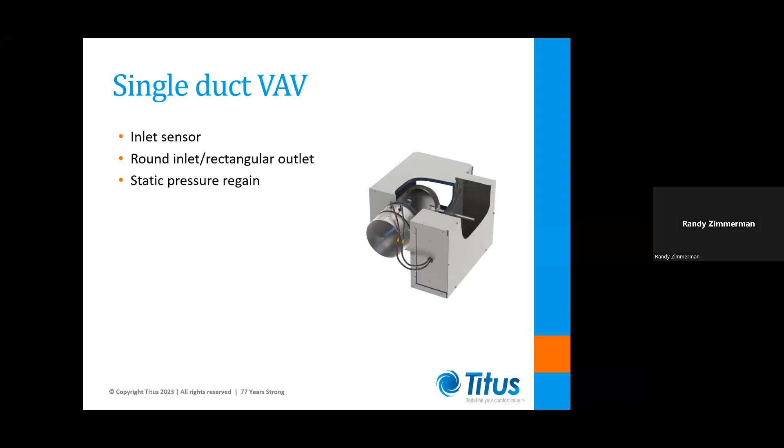Also, that rectangular discharge is the most convenient connection for locally fabricated duct runouts, and we can easily tap into the sides of those rectangular ducts for our diffuser takeoffs. Now, of course, the most common application for a single duct box is usually for handling interior spaces. If they don't have a coil on them, they get cold air, 55-degree air from the air handler, and they can be used to offset internal heat loads in the space.

Now, in order to do that, we generally have to have a pressure independent controller on the box where we can set a minimum and a maximum airflow. So we've got our design cooling airflow, and then the damper closes down to a minimum ventilation airflow that meets the requirements of ASHRAE standard 62.1. And because the controls are pressure independent, they automatically compensate for changes in inlet static pressure. So if there's a sudden rise or fall in inlet static pressure, the controller, since it's monitoring the velocity, then readjusts the damper open or closed to keep it at the desired air volume.

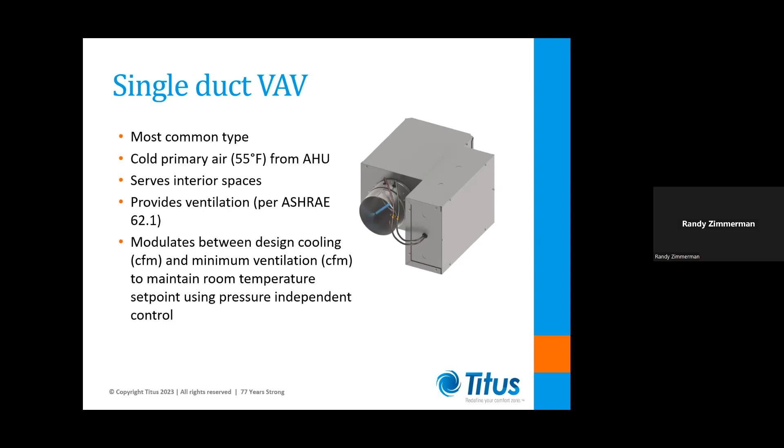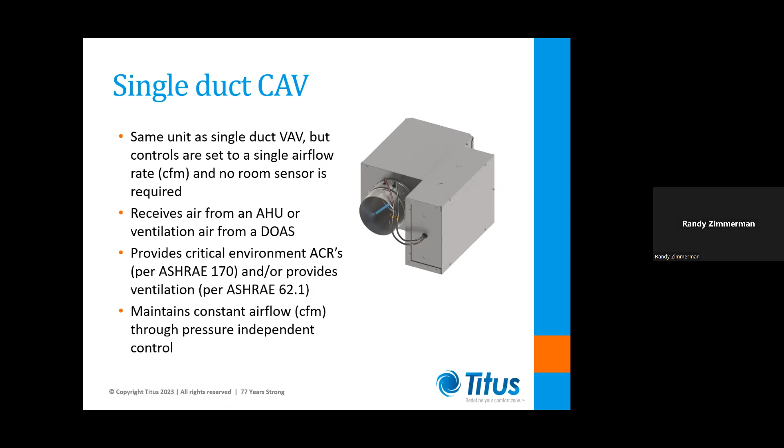Now we can take that same box and we can set the minimum and maximum airflows to the same value. And now suddenly we've got a constant volume box. And constant volume boxes are generally used to provide ventilation or used in critical environment applications where we have to get a certain number of air changes per hour to meet the requirements of ASHRAE standard 170 or to meet the ventilation requirements of ASHRAE 62.1. Now, of course, if we're going to be using this box just to get air changes, but we can't change the air temperature, we're going to have some other way of maintaining the temperature in the room. And that could either be adding a reheat coil to this box or having some kind of separate supplemental heat in the room.

Now, if we want a box with reheat, we're still going to usually receive our cooling from the air handler. And this box might be used to handle perimeter spaces. But whenever we go to reheat, we need to have a minimum of at least 3 different flow rates. We still have our design cooling flow rate. We still have our minimum ventilation flow rate, but then we usually want to have at least one more flow rate, and that would be the heating airflow. Now, in some cases, people will select a single heating airflow and just do constant volume during heating. But with today's digital controllers, it's not difficult. It's usually an option to do VAV heating as well. So this would be a box that would handle a perimeter zone.

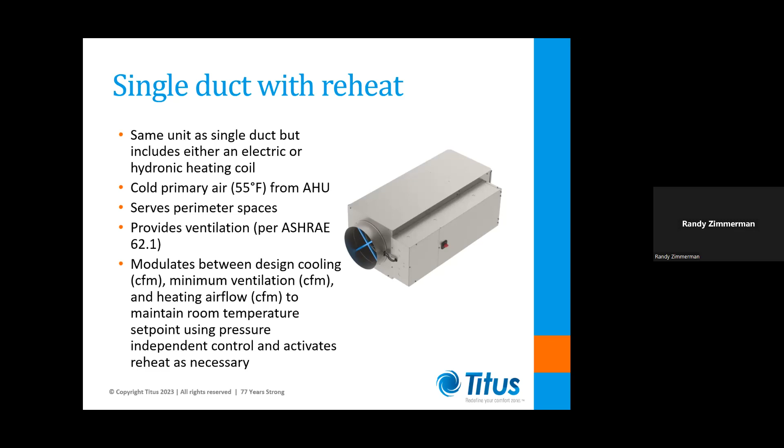Now, here's a sequence that a lot of people don't understand, and that's single duct VAV with auto changeover. Some people call that a heating cooling auto changeover, and some people mistakenly think that boxes with reheat coils are auto changeover because they can go from heating to cooling. Well, that's kind of a misnomer.

When you're doing single duct VAV with auto changeover, it's usually a project that involves leased space at an office park where you've got a suite that somebody's renting, and there's a lobby, and there's restrooms, and a few offices, and a break room, and maybe a stock room or something. And if you want to put VAV boxes in there, generally those spaces are being served with a rooftop unit. And that rooftop unit's going to provide cooling, but it's probably also going to provide gas-fired heat.

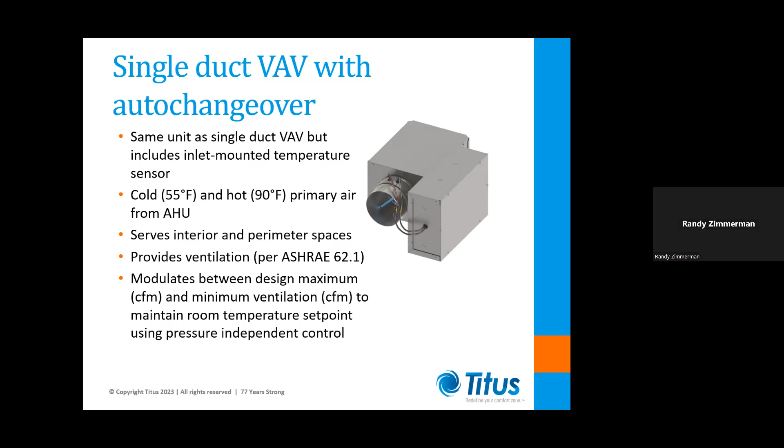And so if you're going to get heating and cooling from your rooftop unit, the boxes need to be able to detect the temperature of the air being supplied so that they can correctly operate to know whether they should be opening or closing to get back to set point. So basically, that usually involves having an inlet-mounted temperature sensor of some sort to clue in the controller when the supply air changes. And the controller then needs to know whether the supply air is hotter or cooler than the temperature that you're trying to control in the space. So that's how we would handle small lease spaces with a rooftop unit.

Now, exhaust terminals, I've got 2 different ones depicted here. One of them is round, the other one is rectangular. Just kind of depends what your duct configuration looks like, which one you should be using. Anyway, exhaust terminals are used in applications where we not only have to control the airflow into a room, but we also have to control the airflow out of the room. And that usually is involved in critical environment applications like healthcare, operating rooms, patient rooms, clean rooms, any place where we're trying to do room pressurization. We can either create a positive pressure in the room or we can create a negative pressure in the room.

Putting the room under positive pressure creates a protective environment, a good place to put a patient that's got a compromised immune system, where we're trying to keep things from reaching the room that could harm the patient. Negative pressure creates infectious isolation. So if we had lab animals or something that had some kind of highly infectious disease, we would want to put them under negative pressure, because that would prevent contamination of the adjoining spaces.

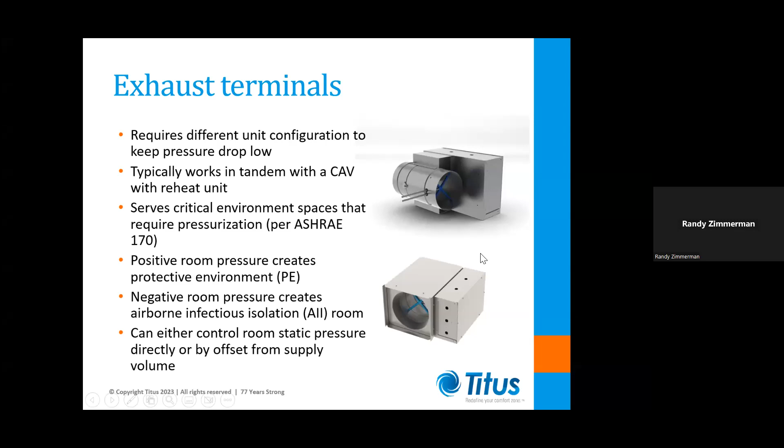And the most common way to achieve that room pressurization is to put an offset, either a positive or a negative offset, in the airflow settings between the supply box and the exhaust box. In some cases, people would tie those controllers together and have them communicating back and forth. Now, here's what you don't want to do. You don't ever want to use a single duct supply box as an exhaust box. Now, people have done it a lot. People do it every day and people get away with it.

But the problem here is that contractors get confused. If you hand them a supply box, they know exactly how to install supply boxes because they do it every day. When you hand them a supply box and tell them that it's an exhaust box, the first thing most contractors will do is go, let's see, for exhaust, I need to flip the box around backwards so that the inlet is pointing away from the room. Well, the inlet on the box is still the inlet. So usually what happens after that is I'll get a call and say they're trying to balance these boxes, but we're not getting a good signal on the airflow sensor. And of course, the explanation there would be, well, you've got the sensor pointing in the wrong direction and it's right behind the damper now. So the damper is shadowing the sensor.

So the way to correct that situation, since it's usually way too late to redo all the duct work, and they may have 50 of them installed like this, the most common fix is to remove the sensor, flip it around the right way, and move it further downstream so that you can get a good airflow signal. Now, it's still not an ideal situation because the aerodynamics of the airflow going backwards through the box, the way it was not intended to flow, creates a lot of turbulence and a lot of pressure drop and probably some noise too. So even if that correction's made, you're still going to have some issues.

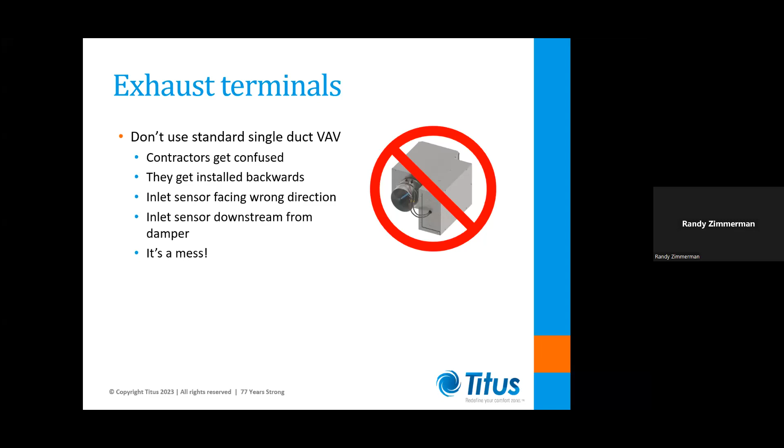So the best thing to do is just don't use supply boxes as exhaust boxes. Now let's move on to fan powered terminals. We make many different models for different purposes. We've got underfloor boxes, we've got low profile boxes, we've got lots of different types of fan powered terminals. But all fan powered terminal units can be divided into two categories. They are either series fan powered or they're parallel fan powered.

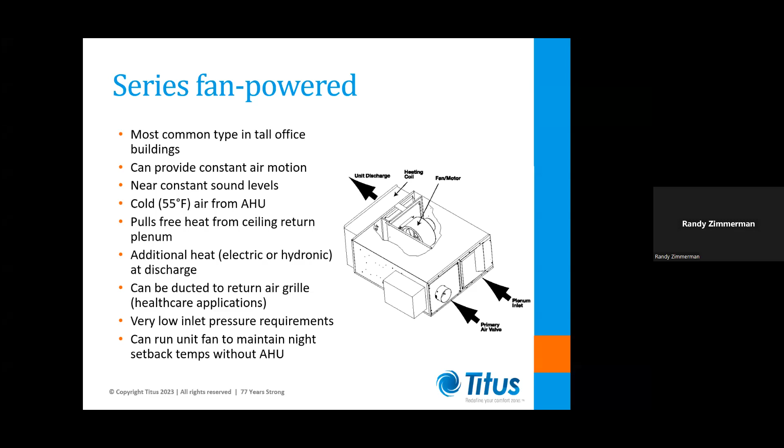So both series and parallel fan boxes have advantages and disadvantages. The advantage of the series box would be you're getting improved room air motion and getting a lot more air changes in the room. So it should feel fresher. You're getting that constant sound level. You've got the reduced inlet pressure. And since the fan is driving the noise level of the box, most manufacturers offer quiet versions of their series fan powered boxes to bring down the overall sound level.

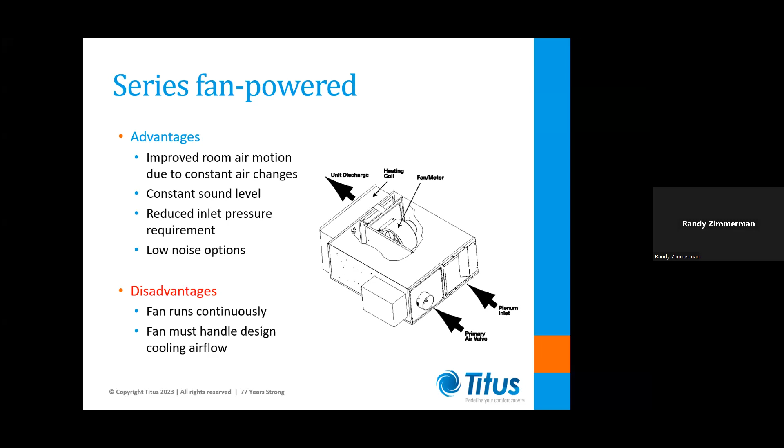Now, as far as disadvantages, well, the fan's going to be running continuously if you want to move air to the room because you can't push that primary air through a blower that's not running. So whenever the building's occupied, the fans need to be running in these units. And then also the fan and blower have to be big enough to handle the cooling design airflow to the room. You'll see that parallel boxes could have much smaller fans.

Now these units, just like the series, are pulling free heat from the ceiling plenum, but we can put additional heat on the units. We can put electric heat at the discharge, or we can put hot water heat at the discharge. But the standard location for a hot water coil on a parallel box is usually on the induction port.

Now, if you're using parallel fan boxes, you're going to have to go back to the higher inlet pressures, like 1 or 1.5 inches. But the unit can still do night setback control without turning on the air handler. Now, these boxes tend to be found in smaller, low-rise buildings and predominantly in warmer climates.

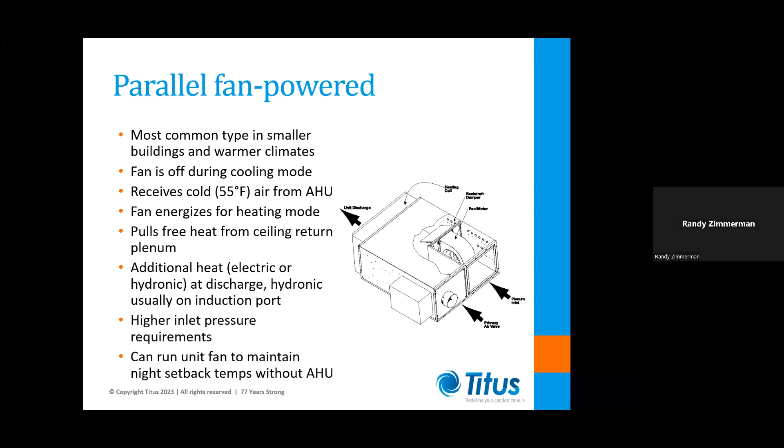Now, if we look at the advantages and disadvantages of the parallel box, the advantages would be the fan only has to be big enough to handle the heating design airflow. So it may only be half the size of the fan that you would find in a series box. The fan only runs during heating. So that means the box is very quiet during cooling.

Now, the disadvantages of the parallel box would be you're getting modulating sound levels. You're getting one sound level at maximum cooling, a different sound level at minimum cooling, and then the sound jumps up when the fan turns on. And anything that draws people's attention by modulating like that would be considered an annoyance for the occupant.

You've got those higher inlet pressure requirements. You've got varying airflow on the diffusers, which means you have to be more careful selecting your diffusers so you don't get into any situations where you've got low velocities on the diffusers and you've got air dumping from the ceiling. That's just dropping in a straight column from the ceiling, causing discomfort for people sitting below.

Now, one of the other things that people often forget to consider on parallel boxes is air leakage. The series fan box has a cabinet that changes from a neutral pressure to a slightly negative pressure as the primary damper modulates. A large portion of the parallel fan box cabinet is under positive pressure in the cooling mode. And since you've got access doors to get into the motor and blower, and you've got wiring pass-throughs and other items, and you've got that backdraft damper, there's many sources of leakage on the fan cabinet. And that really hurts the efficiency of the parallel fan box.

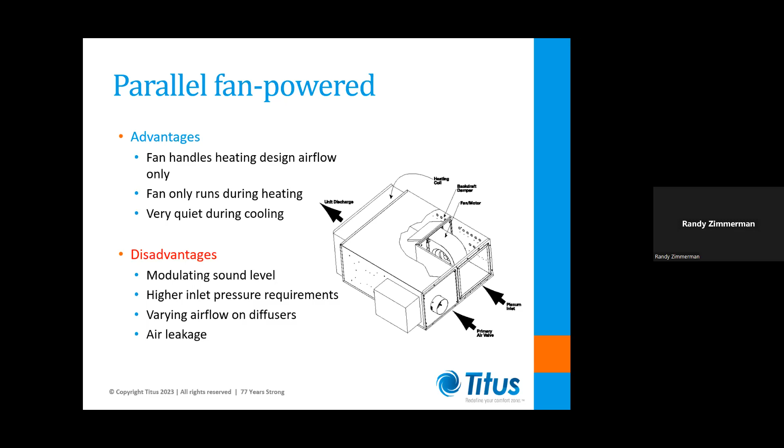Now, there's been a question in the industry for a long time about which fan box is more energy efficient from a whole building standpoint. And ASHRAE commissioned a research project called RP 1292 a number of years ago. They got 3 manufacturers to send large and small series and parallel fan units to Texas A&M University. They tested the units for every aspect of energy. Then they built a computer model of a building that could be moved into different climate zones like San Francisco, Chicago, Boston, Houston, and run at different time of day schedules, and then looked at the whole building energy usage.

And if you ever pull this report off the ASHRAE website and make it to the 400th page, it says which one was more efficient. It says it depends. You know, if you're careful sizing and selecting these boxes, you could get an equal result from series or parallel. Now, to me, that was the perfect answer because all manufacturers that make these boxes make both kinds and they don't care which one you buy. They cost about the same.

But this would also not outlaw one box or the other because I know some engineers and some engineering firms are just more comfortable using one than the other. So this didn't outlaw the use of any of these boxes. But the problem with that report was that all the test samples only had the older PSC fan motors because that was the predominant motor when the project was conceived. But by the time the project wrapped up,

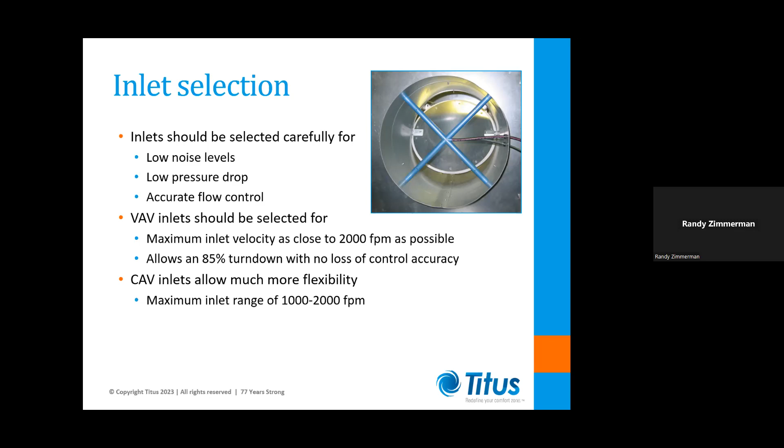Now, if I'm doing a constant volume inlet on a box, I've got much more flexibility because I don't have to consider the turn down effect. So I can size those for anywhere from 1,000 to 2,000. So I can oversize a little bit for constant volume if I'm trying to lower my sound level or my pressure drop.

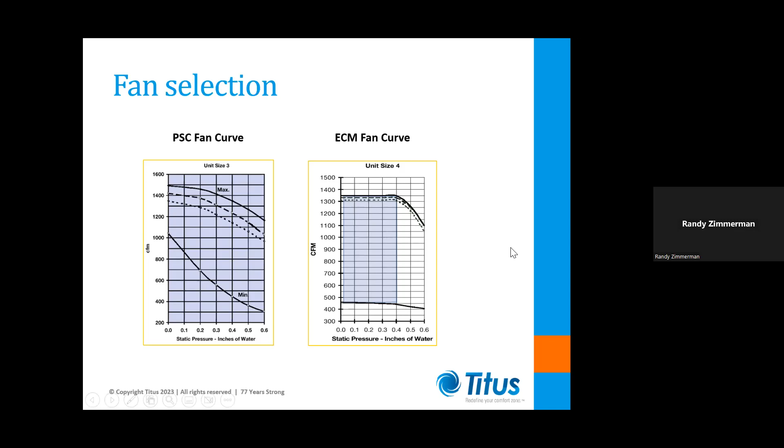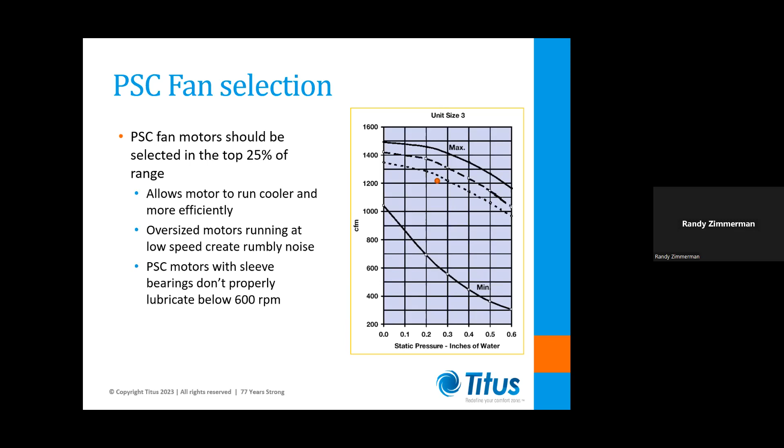So my golden rule for selecting PSCs is to select PSC fan motors in the top 25% of their range. That allows the motor to run cooler and more efficiently. Like I said before, you never want to be down around that minimum curve because PSC motors, when you turn the speed control way down, they tend to hum. They tend to develop a very annoying low frequency hum that goes right through ceiling tiles. So sometimes people shoot themselves in the foot by oversizing the blower and thinking they'll turn it down real low and it'll be really quiet, and they get the exact opposite result. Also, we don't want to burn up our fan motors by dropping below that minimum curve.

Now, ECMs are a totally different picture. They've got ball bearings, so they technically don't have a minimum airflow. Now, we program our motors with a minimum airflow because we know that they can start to pulsate and run rough if you try to run them too slow. So we try to set a minimum operating speed into all of our motors before we ship them out to keep people out of that situation. Now, I like to select ECMs in the lower 50% of their range, if at all possible. They run fine at the top end of their range, but you're going to get higher efficiency and quieter operation in the bottom 50%. So if you can afford to have slightly bigger units in the building, I think you'll get better performance and better energy efficiency.

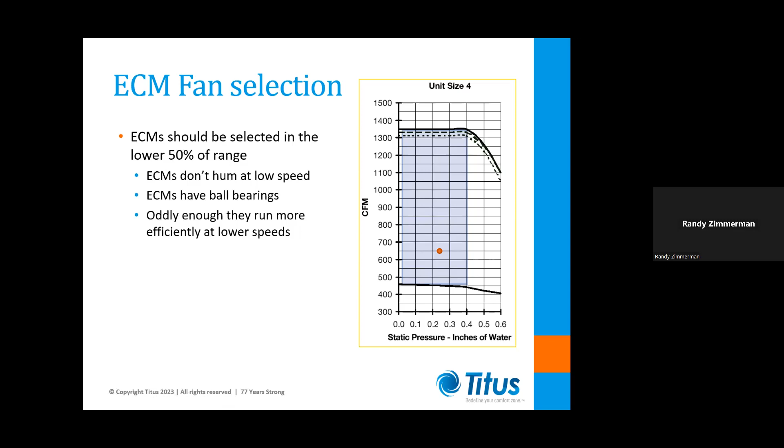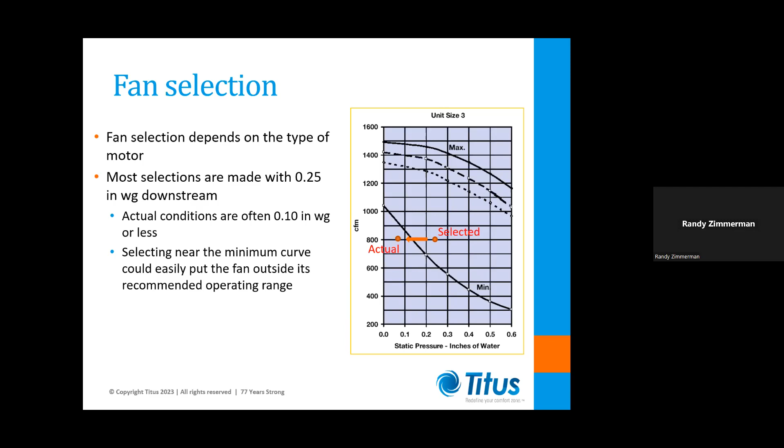Now, here's what you don't want to do. I see a lot of people just as a default assume that they're going to have a quarter inch of discharge static pressure at the job site. So they select the boxes for a quarter inch of downstream pressure. But then when the boxes actually get to the job, they find out they've actually got less than a tenth of an inch. And that can move the selected operating point from one side of the minimum curve to the other side of the minimum curve. And that's when fan motors start to have very short service life because they don't lubricate properly and they can overheat. And that's on PSC fans.

Now, as far as electric coils, there's a few things to look out for. First off, we get a lot of questions about low kilowatts. Somebody will say, why can't I order a 480 volt three phase heater for 1 kilowatt? Well, the problem there is that the higher the voltage and the lower the kilowatts are for an element, the smaller the diameter of the element wire has to be. So the wires get very, very small, and they can get very brittle as they heat up and cool down. So you're going to get a lot of premature failures if you make element wires too small.

That's why we have established minimum kilowatts available for all the different voltages and phases that we offer. It's also important to know that terminal units are generally limited to a total current draw of 48 amps. So if you're trying to put too large of a heater onto a unit, it may not be available. Also, you have to figure on fan powered units, the fan motor current also has to be included in that maximum total current draw of 48 amps.

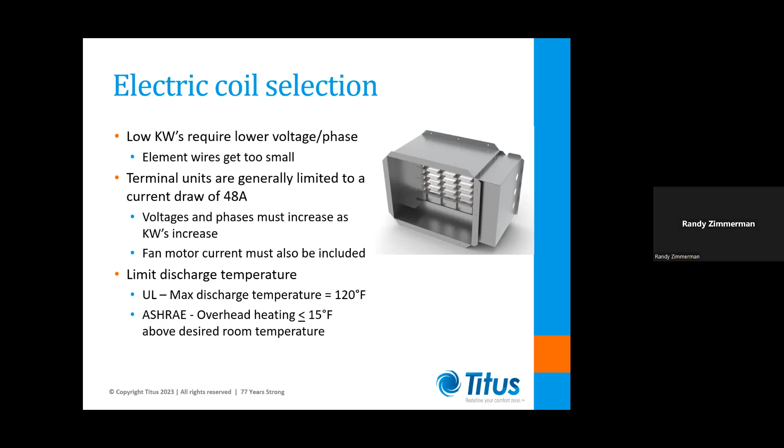So ASHRAE has a guideline that recommends that maximum leaving air temperatures from overhead diffusers should not be more than 15 degrees Fahrenheit above the desired room temperature. So try to limit that leaving air temperature on our diffusers. I'd never try to select it more than 90 degrees.

Now, when we're selecting a coil, there's some guidelines for different types of boxes. For instance, let's say we've got a single duct box with an electric coil, and it's got its entering air at 55 degrees, a heating airflow of 350 CFM, and a heating capacity that we've determined is 2.5 kilowatts. We know the leaving air temperature equals the entering air temperature plus the kilowatts times 3160 divided by the CFM. And plugging in those numbers would give us a leaving air temperature of 77.6.

Now, the guidelines for this type of unit would be, if we assume 55-degree entering air, we have to have at least 70 CFM per kilowatt to prevent elements from overheating and getting dropouts on high temperature limits that could cause our discharge temperatures to vary. So by having at least 70 CFM per kilowatt, that's going to limit our discharge temperature to 100. But if we want to go with the ASHRAE recommendation of not being more than 15 degrees above the room temperature, then you want to have at least 90 CFM. And that will limit our leaving air temperature to 90 degrees. That's easy to remember. 90 CFM per kilowatt gets you to 90 degrees.

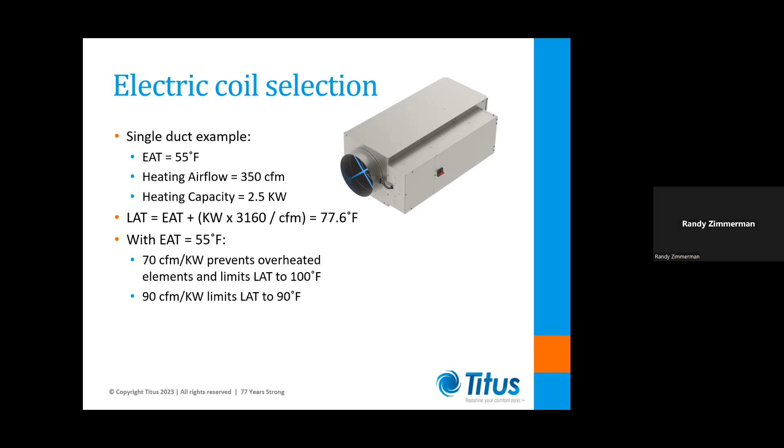Now, here's an example of a fan box. Let's say it's got an entering air temperature of 55, plenum temperature of 70, heating capacity of 7 kilowatts, a fan airflow of 1,000, and a minimum primary airflow of 200. Then the mixed air entering the coil is going to be equal to the entering air times the primary minimum airflow plus the plenum times the fan airflow minus the primary minimum, divided by the fan airflow. And if we plug in all the numbers, it gives us an entering air temperature on our coil of 67 degrees. Now, if we want to know our leaving air temperature, that would be our coil entering air temperature plus the kilowatts times 3160 divided by the fan airflow, which gives us a leaving air temperature of 89.1 Fahrenheit.

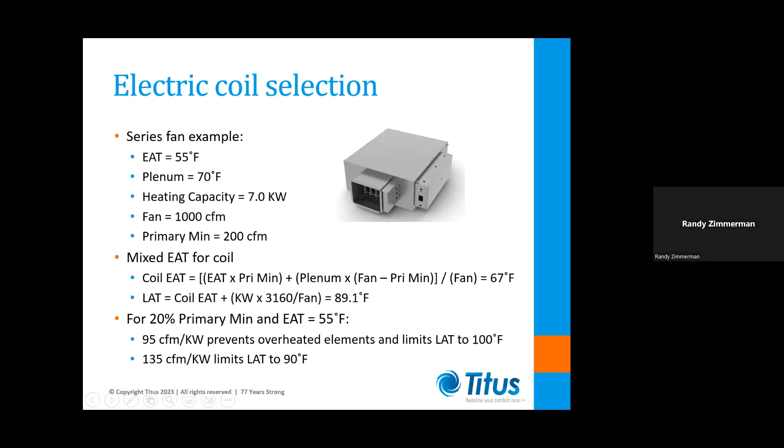So if we've got a fan box with a 20% primary minimum and an entering air temperature of 55, we need to have at least 95 CFM per kilowatt to prevent overheating. And it would be even better to have 135 CFM per kilowatt because that would limit our air temperature to 90 degrees.

Then for a parallel example, if we've got entering air 55, plenum air 70, heating capacity 5.5, fan at 600 CFM, primary maximum at 1,000 CFM, and primary minimum at 200 CFM, we can calculate our coil entering air temperature at entering air times the primary minimum airflow plus the plenum times the fan airflow divided by the fan plus the primary minimum, which equals 66.3 degrees.

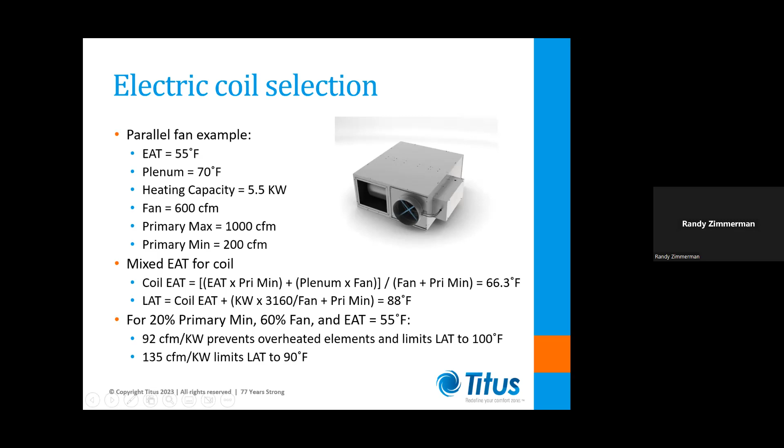Now, if we want to know our leaving air temperature, that's going to be our coil plus the kilowatts times 3160 divided by the fan plus the primary minimum, and that equals 88 degrees. So for a 20% primary minimum with a 60% fan, that's 60% of the primary design maximum, and an entering air temperature of 55, we need to have at least 92 CFM per kilowatt to prevent overheating, but it would be better to have 135 CFM per kilowatt to limit our air temperature to 90 degrees.

Now, as far as hot water coils, a lot of times I see that people are getting too much information. You're never going to be able to match a coil schedule exactly unless you were the basis of design. You basically need to just select a coil that meets or exceeds the desired capacity or leaving air temperature without exceeding the maximum water flow by too much. And then just keep an eye on the water side pressure drops.

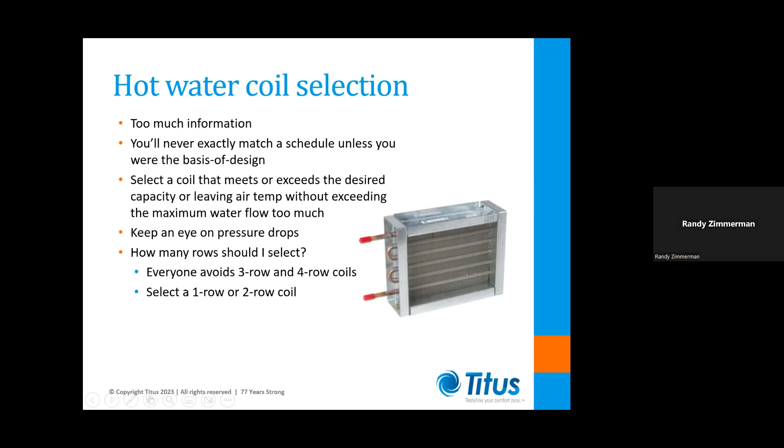So, how many rows should I select? Well, most people don't want 3 or 4 row coils. So, usually you're only selecting between a 1 row or 2 row coil. One thing that people need to look out for is low water flow. I see a lot of people scheduling water flows in fractions of a GPM, and that just doesn't make sense.

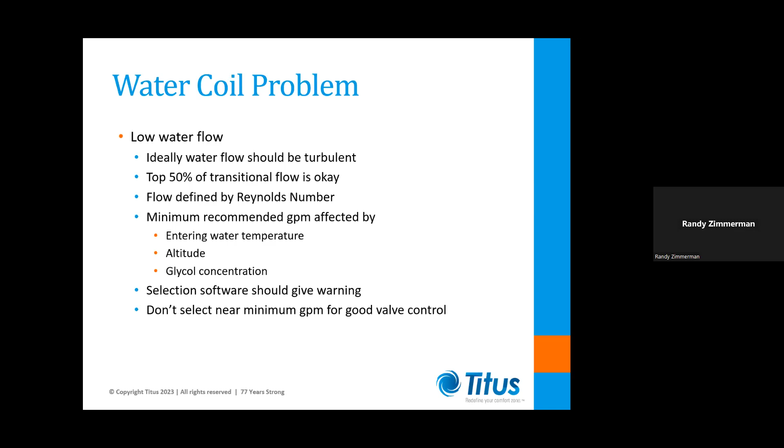Our coil selection program does a calculation for the Reynolds number and will allow selections in the top 50% of transitional flow. But once you go below the top half of the transitional flow mode, that's when your MBH, your heat capacity calculations become unreliable and are usually overstated. So we want to stay away from that. And we also don't want to select at the minimum recommended GPM, or we're going to have very poor valve authority, poor control valve operation. The valve is going to be just cracked open, then closed, and then just cracked open. Your modulating water valve would just act like a 2-position valve.

Another thing we have to contend with is low water temperatures. Back in the good old days, everybody had 180-degree water. Nowadays, I'm seeing a lot of 110 and 120-degree water. The heat requirement may be the same, but something's got to change. We can offer more rows, but that's more air pressure drop that you've got to push the air through all the time. We can give you 12 fin per inch coils instead of 10 fin per inch coils, but that doesn't really give you very much difference in operation.

The best solution to dealing with low water temperatures for single duct boxes is what we now offer as an enlarged casing option. That gives you increased fin area, which gives you increased capacity, a standard fin count, and the lowest cost. It's basically by giving you more face area on the coil, that is the best solution for dealing with low water temperatures. Don't add rows.

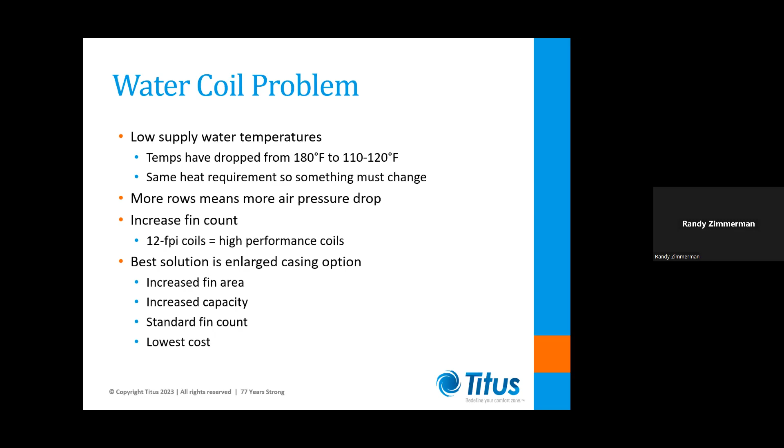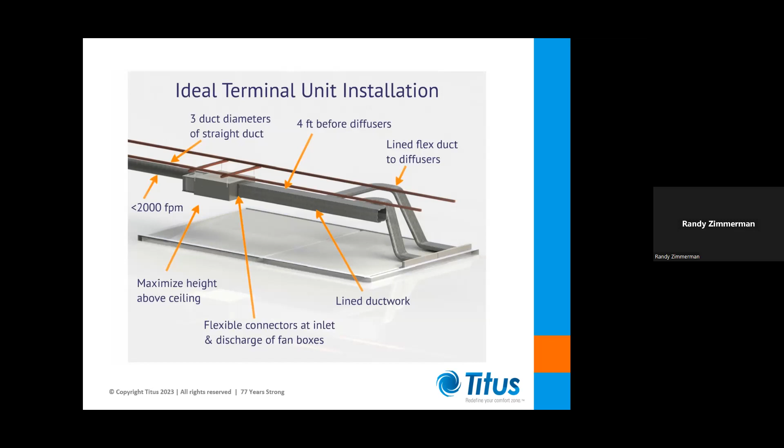And as always, proper installation can help ensure proper performance.